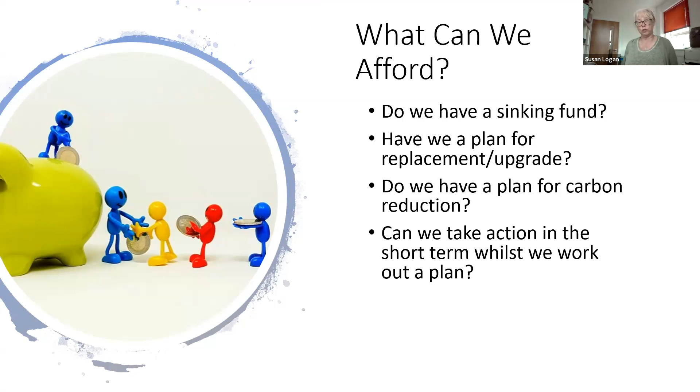Can we take action in the short term while we work out a plan? The sinking feeling that any heating advisor gets when you get the call - our boiler has failed, we need to put a new one in - has, I think, even increased since the new permissions, because we can't just say no, you can just put another gas boiler or an oil boiler in. You're going to have to think about it. If you've thought about it already, it makes it so much easier.

So don't leave it too late. Don't assume you'll get permission for like for like - with gas and oil boilers, you probably won't. You will have to think about what you've got to do. There are now quite a scattering of consistory court examples where churches have been challenged about trying to put like for like or carbon heavy systems in. If you've had advice from your heating advisor or from a professional, don't let it gather dust - make sure you act on it.

I have a number of examples of churches where I perhaps visited 10 years ago, and now they've got a crisis. Unfortunately, much as I would like to help, the DAC and chancellor's attitude is, well, you were told, and perhaps it's not as easy as you might think.

So get those reports out, get those quinquennials out and have a look at them. Have a plan for carbon reduction, which does not have to be a new system. People think that carbon reduction is a brand new, shiny, expensive system. It isn't necessarily. It can be using a smaller space, or putting a hybrid system in to allow you to use a more efficient system for some, if not all, of the year. So it doesn't have to be a new system. And I would say probably a lot of churches I go to, it's not a single answer.

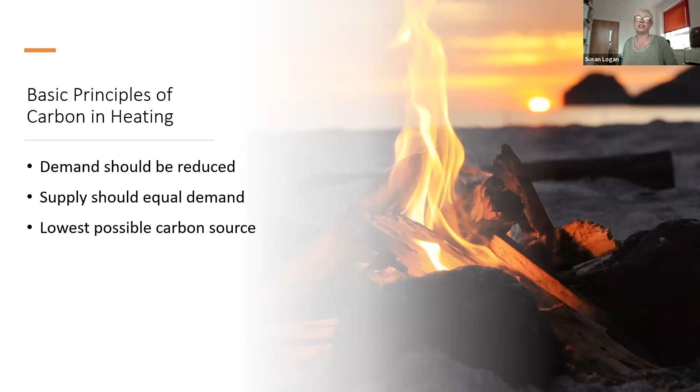Now, why is it in that order? And it is in that order. Low carbon heating systems are very expensive and cost quite a bit. Well, all heating costs a lot to run these days, doesn't it? So you must minimize the size and the demand of your system so that the capital cost is the lowest it can be and the running cost is the lowest it can be. It's not much point putting a massive, great electric heating system that you can't afford to run.

The Victorian churches were designed very often for a lot of people and a lot of fumes and odours, and therefore an awful lot of fresh air. We don't need that amount of fresh air. What we're doing actually is throwing heat out. So look at where the air's coming in and going out of the church.

Use space wisely. Don't heat any more than you need to. Seriously consider for small services of just a few people whether you could heat a smaller space. Deliver heat where it's needed to people - we'll talk a lot about people heating later on. And don't waste heat, putting heat where it's wasted, i.e. heating spaces that you're not currently using.

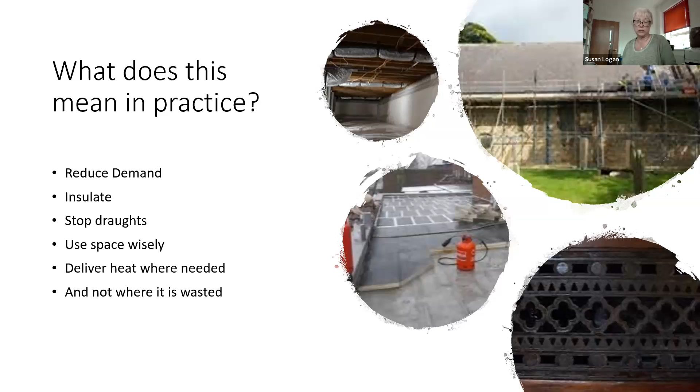So when we think about supply, we keep the size of system down if we can. We heat where we need it, again, we control and we zone it. There's a lot of debate about running continuously or not, and the answer is it depends. If you only use the church once a fortnight, then clearly running it continuously is not going to be a good idea. If, on the other hand, the church is used most days of the week, then controlling the heat between limits to let it cool off a little bit but not right down is probably going to be a better idea.

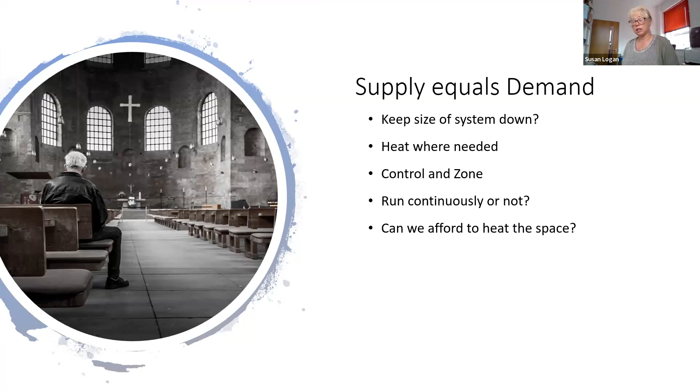Sometimes we will have to run our heating most of the time to preserve precious artifacts, but not often. Can we afford to heat the space? We've got to be realistic in this day and age with cost of living problems, with dwindling congregations in some places, with increasing fuel costs. We have got to be very, very realistic about whether we can frankly afford or wish to use the carbon to heat a very large space when we don't need it. And that's a hard fact, and it's a hard thing to come to terms with. I know that, but we do have to be practical and realistic on that topic.

Now, a little word about hours. People say to me, electricity is more expensive than gas or oil, isn't it? Well, yes, it is. It's about 3 times more expensive.

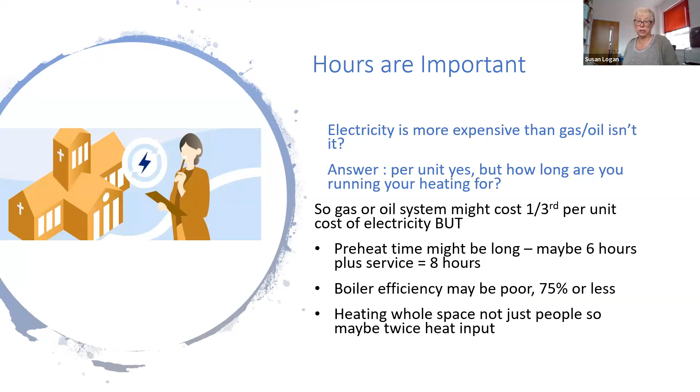But how long are you running your heating for? Your gas or oil system might cost a third of the pence per unit of electricity, but how often do we find churches where the heating runs all night just to get it warm enough for the service? The boiler efficiency may be poor, 75% or less, and we could be heating the whole space, not just people, so maybe twice the heat input. By the time you've looked at all of that, an efficient electric system is 100% efficient.

It might be on for 2 hours instead of 8, and it might have a lower capacity. Here's a little example: 150 kilowatts for 8 hours, delivering 130 kilowatts, 113 kilowatts, at 10 pence a unit. That 113 is after you've taken your boiler efficiency off. That might cost you £100 to £120 for a service. If you can deliver heat to where people are, for example under pews, with a much lower rated system in kilowatts, yes your unit cost might be 30 pence, but you're only putting it on for 2 hours, and basically it's a third of the cost. So even with an efficient boiler and 4 hours preheat, it could still be 70. You might not warm the whole space, but you may deliver comfort, and it doesn't have to cost more.

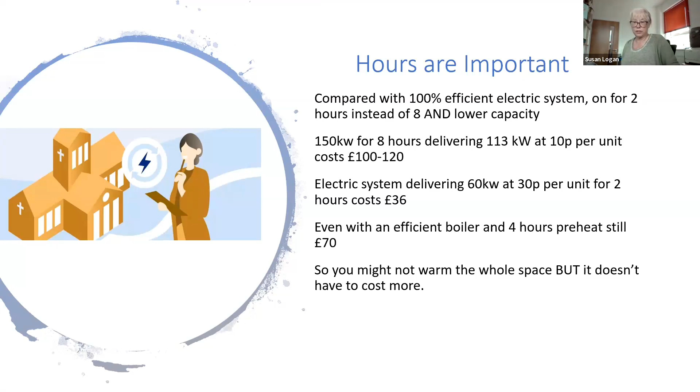The government puts out figures every year. These are average figures. The electricity figures fluctuate day by day, and you can look at any point and see a different carbon factor for electricity. However, these are averaged over last year. Electricity is still falling, and it's coming down. So how is that carbon generated?

It's at the power station. If a power station burns gas or whatever else, it emits carbon dioxide. Now, clearly renewables such as wind, solar and hydro emit an awful lot less, or nothing. Gas is fairly stable, though there's a possibility of greener gas or hydrogen in the future, or biogas from decomposition effectively blended into the mix. Hydrogen could be blended into the mix too, but not all hydrogen is green - it depends how it's made.

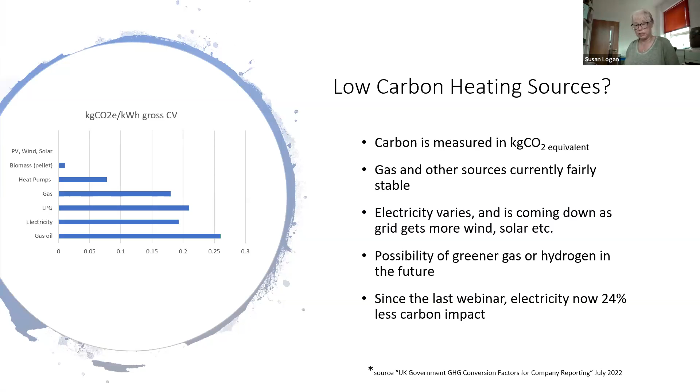Since I did the last webinar a couple of years ago, electricity is now 24% less carbon impact on average. So this is where our carbon comes from. Photovoltaics, wind and solar are zero in terms of their operational carbon, and biomass has a small impact. Generally it's a complicated equation with biomass, but there is a sequestration effect of CO2 in timber. But these are government figures.

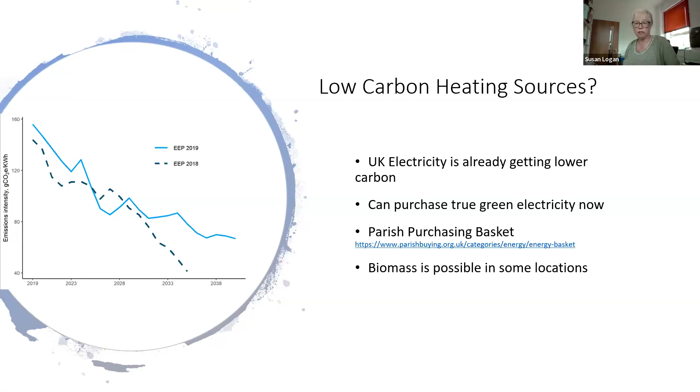You can debate them, but I use the DEFRA figures as an accepted industry average. So for our low carbon heating source, well, our UK electricity is already getting lower carbon. We can purchase true green electricity now via the parish purchasing basket, and biomass is possible in some locations. And we can of course put our own generation in terms of photovoltaic panels.

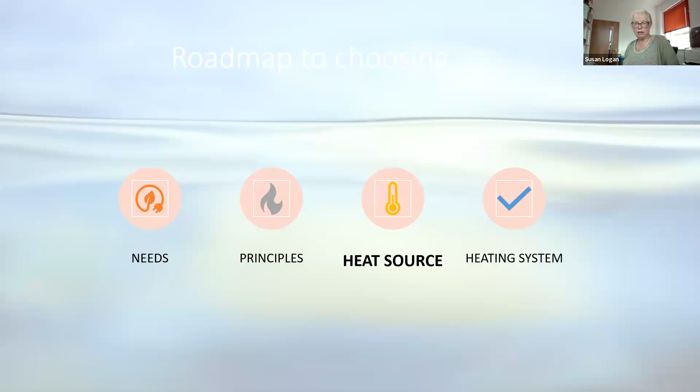So moving on then from principles, what does that mean in terms of available heat sources? What I'm going to do now is give a broad palette really of heat sources. So what to choose? As a principle, the lowest carbon source for the life of the system. Our church heating tends to live an awful lot longer than it does outside in the rest of the commercial world, partly because it's not used so often, partly because there isn't often the funding to replace it.

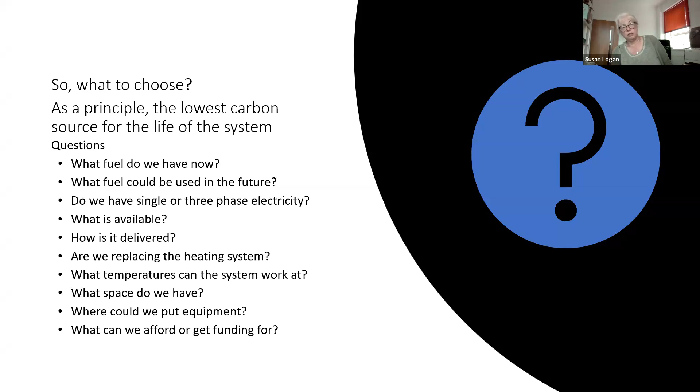So what do we have to ask ourselves? Some questions: what fuel do we have now, and what could we use in the future? One of the biggest questions is the third one: do we have single or three-phase electricity? And if we don't have three-phase electricity, could we get it? Why do we ask that?

Well, three-phase electricity gives you probably enough capacity to heat a medium to large church. Single-phase electricity, probably rated at 80 or 100 amps, would just about squeak through for a smaller church, but it won't really give you adequate capacity for a medium or large church. So that's why that's an important question. A lot of low carbon heating, such as heat pumps of any size, need three-phase electricity. So is it available?

In towns and larger conurbations, yes, three-phase electricity is probably available and affordable. In rural areas where there isn't the infrastructure currently, it could be unaffordable or just not even practically available. If you go out and walk in a rural area and see overhead lines with things that look like little radiators on poles, that's a little transformer, and that's a good indicator that the infrastructure probably isn't that good. It could be extremely expensive because if you apply for a three-phase supply, the local network operator may have to go a long way back to be able to supply it.

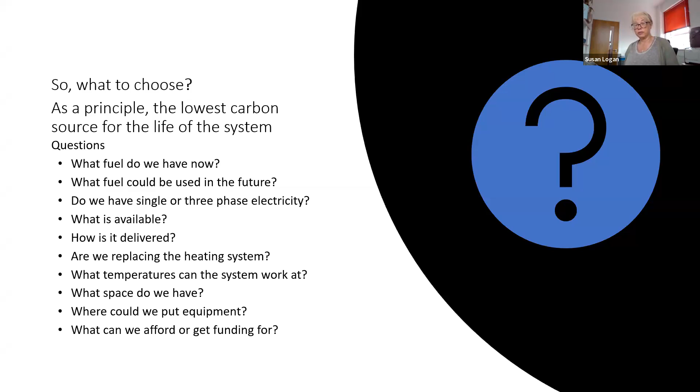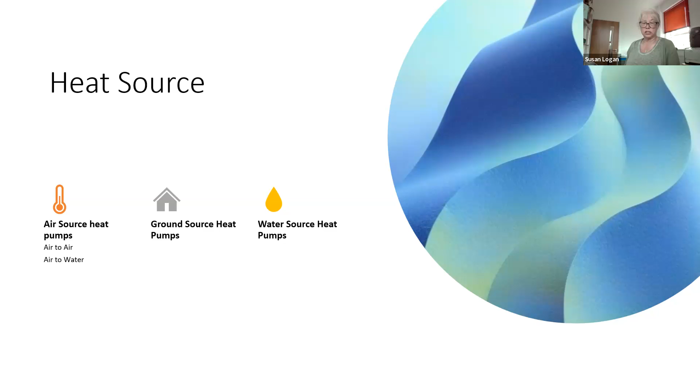So we come on to looking at heat sources, and the first grouping is heat pumps. I'm going to just have a look at the different types, because there's a few of them, and it's good to get that into our minds.

So the first type is a heat pump that goes to a wet system. What's a wet system? It uses hot water through radiators, fan convectors, underfloor heating, whatever. It heats water up. It works on electricity. As we've said, many churches will need a three-phase supply. You've got refrigerant gas in there, which is effectively the driving force. Very roughly, you get 2.5 to 4 times heat out for 1 kilowatt hour in. There are hybrid systems, or you can link boilers to them, where the size of heat pump would be too big, unaffordable, or not used at capacity for very much of the year.

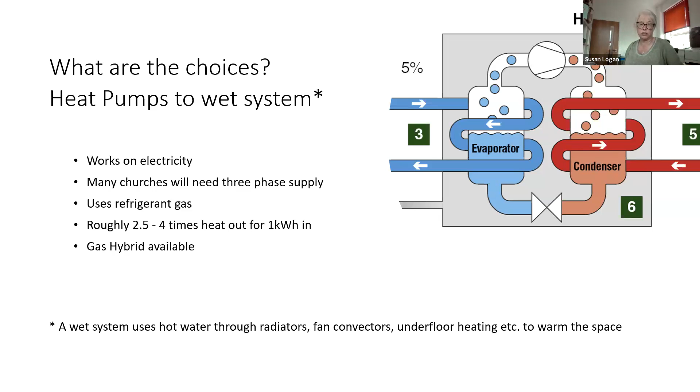Where does the heat come from for heat pumps to wet systems? Well, it can come from the air. Somewhat miraculously, it's just a reverse fridge, really. It's less efficient than ground or water. The big issue that catches people out is that the efficiency varies an awful lot by season. When the weather's mild outside, you might get 6 times heat out for one unit of electricity in. But when it's really, really cold, you might get 1 to 1.5. So the bills can be lumpy.

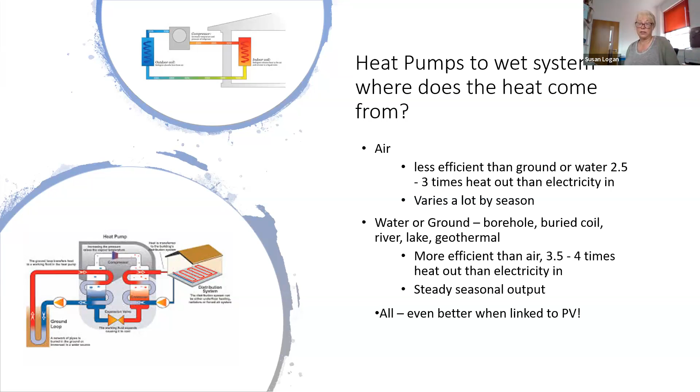Just be warned on that one - it will even out over the year, but it can be a bit of a shock in cold weather. The heat can come from water or ground, from boreholes, from buried coils, from rivers, lakes, geothermal sources. These are slightly less common, of course. They're much more efficient, or substantially more efficient, than air. Steady seasonal output, but the capital cost is higher and there's more engineering and investigation needed. All of them are better linked to PV, because then you're getting free electrical input to them, not necessarily to offset all of it, but some of it.

But there's another type that I'm increasingly finding useful, particularly in smaller churches, and these are air-to-air heat pumps. They're not the prettiest things in the world, although you can put them in casing. They're quite efficient, and some of them can run on single phase, and you can install them in phases - so if you can only afford 3 to begin with, you can put 3 in, then add more when you get more funding. You don't necessarily have to commit to a huge amount of funding. You can also put them on top of an existing heating system, running the air-to-air heat pumps when they provide enough heat, and topping up with your older fossil fuel system, eventually phasing it out. So it gives you a softer introduction to low carbon heating.

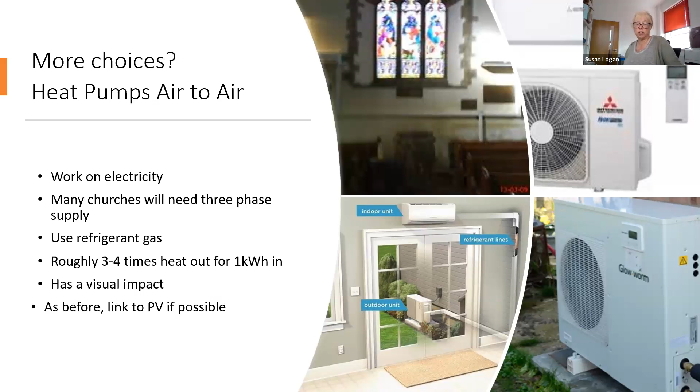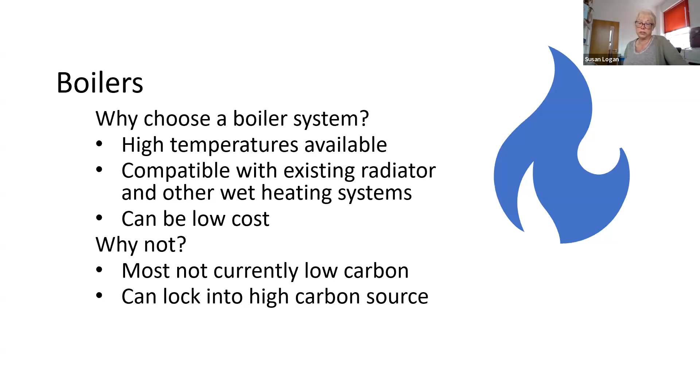But we can't disregard boilers, can we? They are the mainstay of our heating. Why choose a boiler system? Well, it gives you higher temperatures, it's compatible with existing radiators, and it can be low cost - but it can lock you into a high carbon source. Therefore, as a standalone solution, it's unlikely to be accepted in this day and age if there is a viable alternative, and more often than not there is at least a partial viable alternative, if not a 100% solution.

So a quick summary of our boilers. We've got gas - we all know what a gas boiler is, so I'm not going to go through this word for word. The future is uncertain. Obviously you will know that gas boilers are being phased out of new housing by 2025. Obviously we will continue to be able to purchase gas boilers for a long time, but they're not a green solution at the moment.

Biogas has poor availability. It may get better - there may be local availability unusually, but in certain areas, particularly where there's farming and anaerobic digesters, you could have a local source of biogas, and that of course would be a green solution if you could find it. So at the moment biogas is a minority, but it is feeding already into the main grid.

Hydrogen - lots of debate about hydrogen, uncertain, we don't know. There's likely to be hydrogen hubs in very high usage areas, and hydrogen is probably going to feed into the grid. Some boilers are suitable for conversion. So at the moment we don't know, but I don't think you can rely on it as a low carbon solution to say, well, I'll put a boiler in that's going to be converted to hydrogen. That really won't wash, particularly if you're in a rural area, because the chances of getting hydrogen are really quite low at the moment.

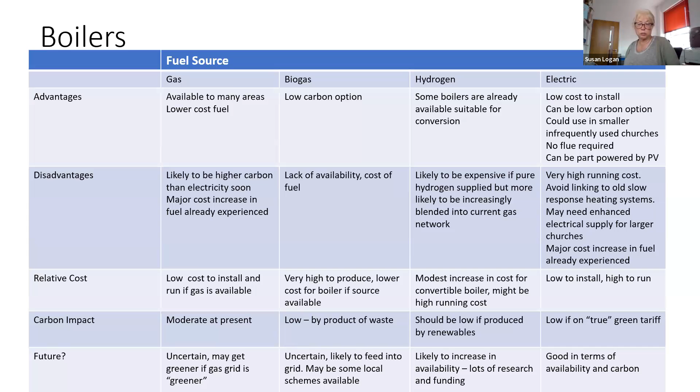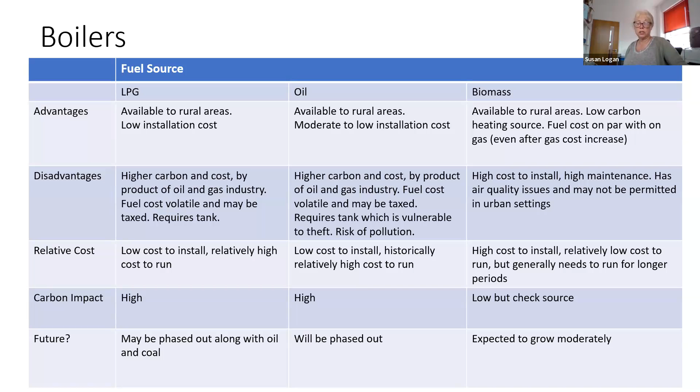Liquid petroleum gas, or Calor gas, is available in rural areas, but it's not a green solution, possibly going to be phased out, and is always going to be linked to the oil and gas industry - so generally not recommended. Oil we've already discussed, and biomass - which is a boiler that runs on wood pellets. We could also include log burners in that, but that's all biomass. The problem with biomass in inner city areas is air quality, because they do emit particulates, and there's quite a lot of restrictions on them. Having said that, if you've got a rural area with good availability of local biomass, then it's certainly a low carbon possibility, if you have an enthusiastic congregation that will manage the source. So I would always encourage people to be open-minded on biomass.

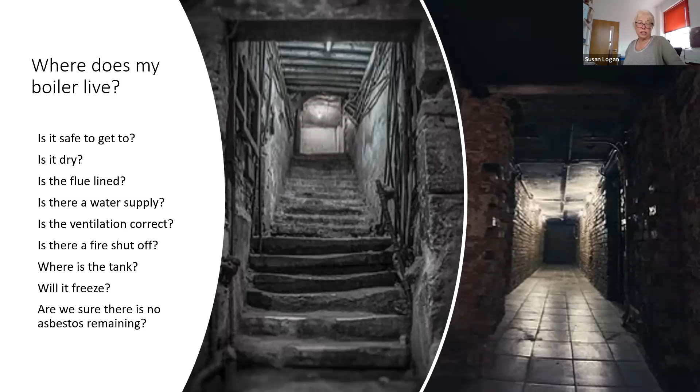And we need to look at where our boiler lives if we've got it, because unfortunately boilers live in some fairly damp, dark locations. The one thing I would say is that a lot of modern electronics will not take kindly to the damp undercroft. There's a few questions there about where we should put things, because I do come across a lot of unsafe and unwise locations for our plant - not just boilers, but anything really. We need to often think about a new location.

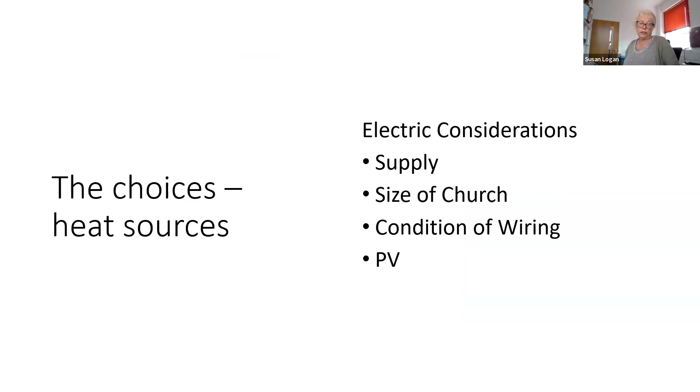Obviously, electricity is a heat source, but I'm going to come on to that when we look at the actual emitters a little bit further in this presentation. A few considerations that we've already talked about. Have we got anything else? Well, there are some other sources.

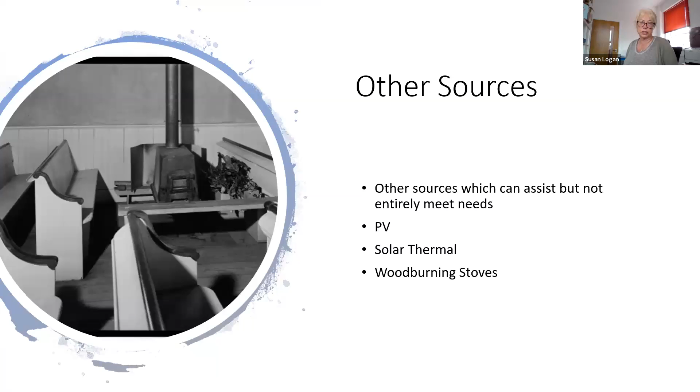Churches used to have, quite often, very small churches had a wood burning stove, and a modern wood burning stove in a small church should be in our palette of possibilities. We obviously have to make sure that it's safe and that nobody gets burnt on them, but nonetheless, they are a nice, warm and traditional heat source. We have our photovoltaic panels, we have solar thermal that can, in some instances, heat our domestic hot water that comes out the taps, and our wood burning stoves.

So now we come on to thinking about the system itself. This is the bit that delivers the heat to where you are. This is the bit that makes you comfortable. And of course, is probably the most important thing at the end of the day. It's what we see, it's what we feel, it's what we experience in our churches.

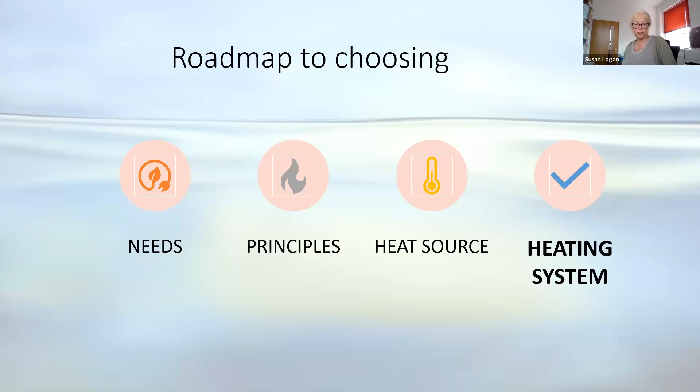First of all, we need to think about safety. A risk assessment, no matter how simple, we need to think about our users. Have they got vulnerable adults, young children? Is our system safe for touch? If it is, then obviously we need to think about emitters that are either protected or are intrinsically low surface temperature.

If we've got spaces where there's a lot of sport or activity, equipment is likely to be damaged. A good example is copper pipe, which is not what it used to be. It's quite thin and was regularly run into with vacuum cleaners until it was actually useless. So we have to think about what damage can occur. And can we keep people away from equipment? Clearly we don't want anybody to be able to access boilers and controls.

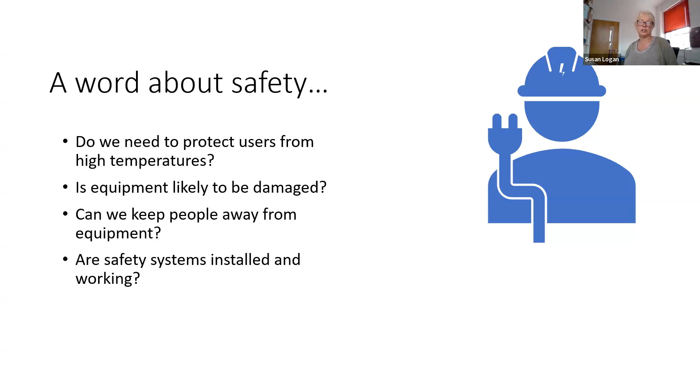And have we got safety systems installed and working? By that I mean, what happens if there's a fire? What happens if there's an emergency? What happens if the boiler or the heat source goes wrong? Have we got safety systems, and are they installed, working and checked? So things that might, for example, isolate our gas or oil.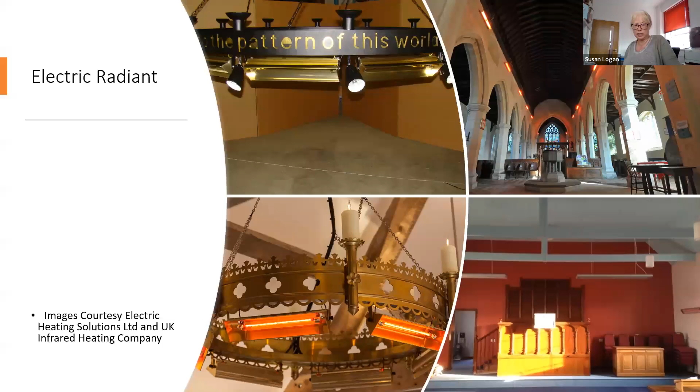The bottom right-hand picture, you can just see some white panels suspended, and they're called far heaters. They don't glow. They're not particularly hot, and they're very useful in certain instances. But you'll see there that they're mounted quite low, and they have to be, because if they're mounted too high, they really don't work. But where you can mount them quite low and near people, they're another useful form of radiant heating. So summing up on that one, we've got electric heating, radiant and far.

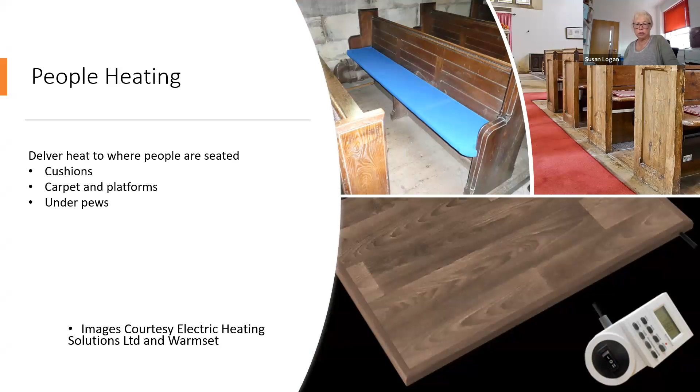People heating, delivering heat where people are seated. So we've got cushions, carpets, platforms, under pew heating. You'll probably be familiar with that, so I'm not going to spend too long on it because I haven't got that much time. So we've got our cushions, and all of these, of course, are low carbon sources.

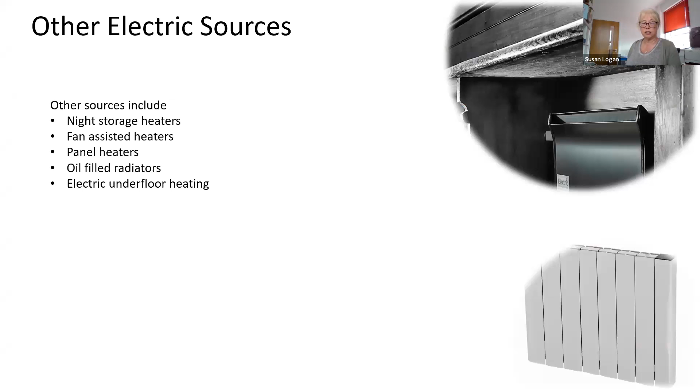Other electric sources, we've got night storage heaters, fan assisted, oil-filled radiators, and electric underfloor heating. All have got their uses. The only thing I'd say about electric underfloor is it can be very expensive to run, but it can have its uses for small, hard-to-treat areas. I've seen it used in a pilgrim sleeping space, which was only a few meters squared, and it was quite a good solution.

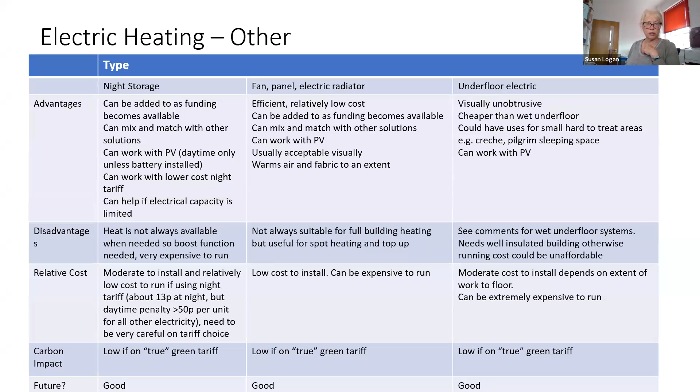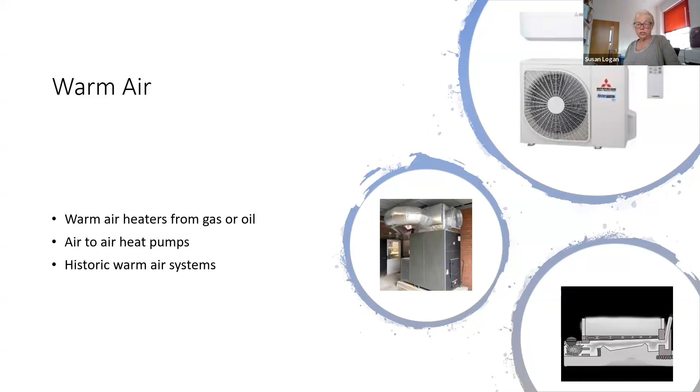We've got our air-to-air heat pumps, which we've already talked about in the heat pump section. So here they are again as a warm air heater, because that's what they do, they warm the air. And then we have sometimes encountered some historic warm air systems where a boiler did actually directly heat air in ducts. What's of use to us now? Probably only the air-to-air heat pumps, I guess. The direct or indirect gas or oil air handling systems, if you've got one, you probably need to think about replacing it.

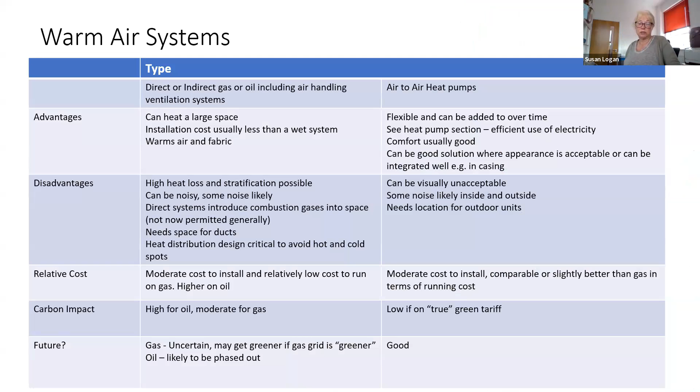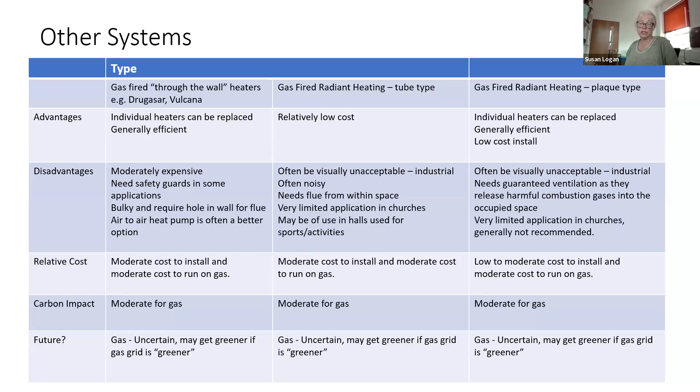Gas-fired radiant heating, very industrial. I've never seen it in a church. It is possible, and I have been asked questions about it. They're quite noisy, but again, as a gas, they may have their uses in sports halls, but not really in our churches in general. And then you sometimes come across old plaque gas-fired radiant heating. So it looks like a radiant heater. It's got a gas supply to it. Unsafe generally, and if you've got that, you need to be looking to replace it. It does put out quite unpleasant fumes into the space.

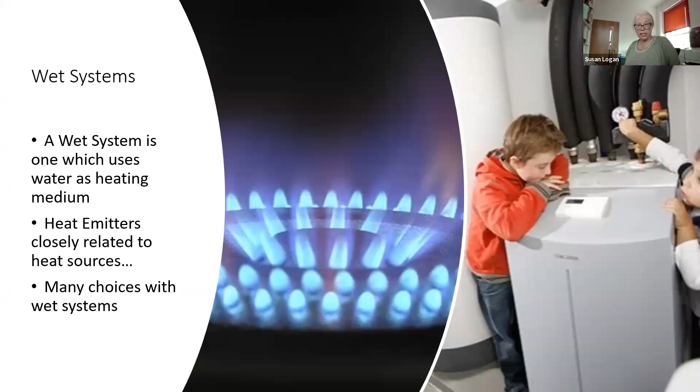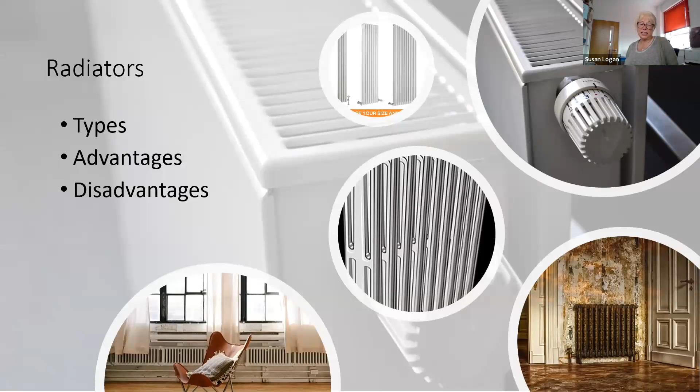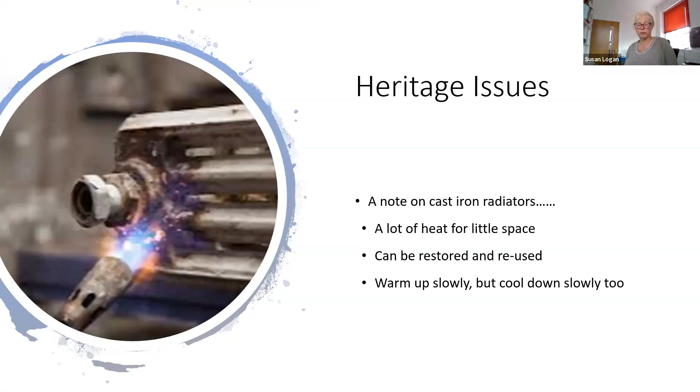And then lastly on our systems really is wet systems. This is the thing we are all familiar with. This is water as a heating medium. So we are with our radiators of one sort or another. Radiators are great. They're comfortable. They provide warmth, a perception of warmth, particularly when they are close to where people are. They can take up quite a lot of wall space, but there are types that don't. If you've got cast iron radiators, don't dismiss them. They can produce a lot of heat for little space. They can be used on low temperatures as well, although they'll need to have additional capacity if you're putting a lower temperature to them.

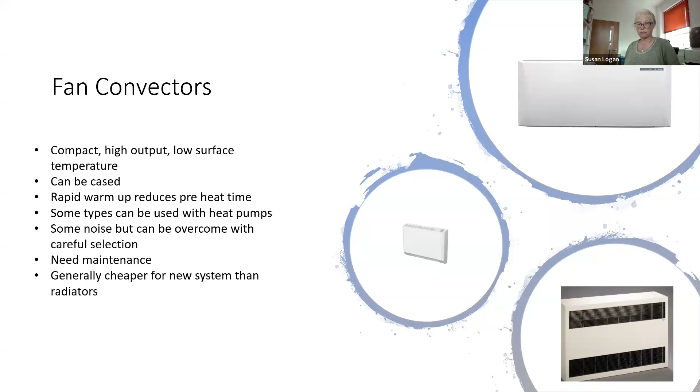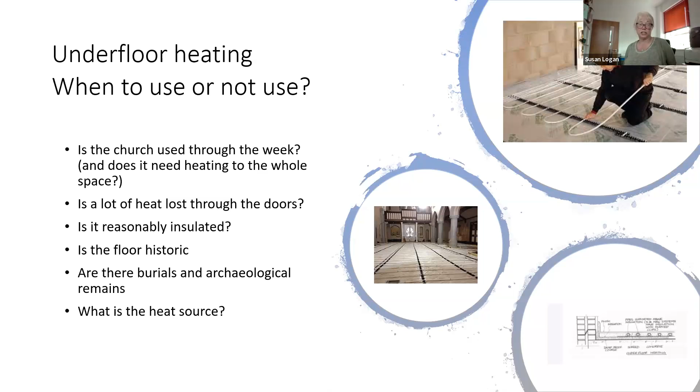And there's a lot of debate about destruction of historic floors, destruction of burials, archaeological remains. Changes in level is another big issue because you've got to insulate underneath and it causes changes in levels. And have we got a suitable heat source? But if you've got a well-insulated space and a heat pump, underfloor heating should definitely be considered for spaces that are used for a lot of the time.

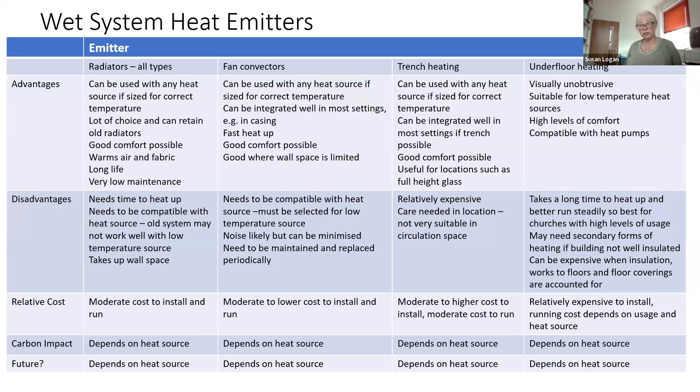I'm running out of time a little bit, so I'm not going to go over the summary of this because we've still got a few slides to go, but you will get the slides later.

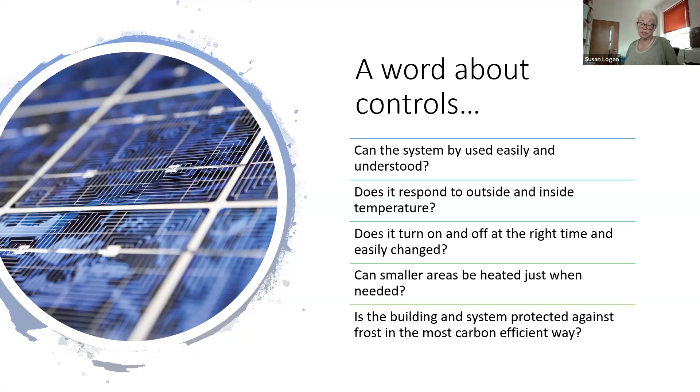Water doesn't freeze above zero. It doesn't need to be protected that much. And generally, buildings don't need to be protected against frost unless you've got something very precious in there.

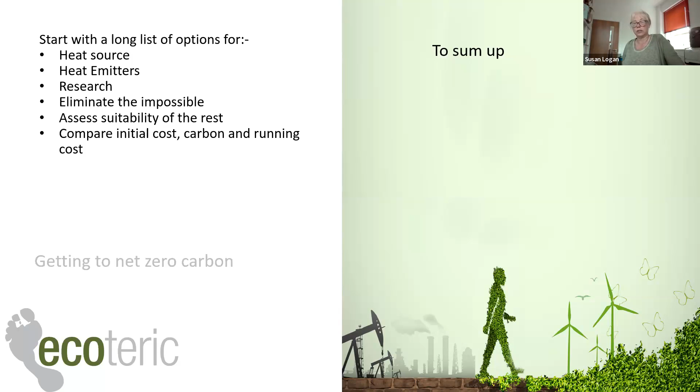So to sum up, what do you do? Start with a long list of options. What could you do? Research, eliminate the impossible. Assess the suitability of the rest. What fits, what's right? And then look at not just the first cost, but the carbon and the running cost as well. Get yourself down to a short list, get some budget costs, seek advice, develop proposals, and of course, seek funding.

Look at the whole life cost. What do I mean by whole life cost? What I mean is the capital cost plus the fuel and carbon, the fuel cost used over the life of the equipment, running cost now and in the future. Where's cost going to go? Well, we can't possibly know, but then we couldn't predict what was going to happen to energy cost before. What we do know is it'll probably go up. It's not beyond the bounds of possibility that we'll get carbon taxation in the future. What's the life of the equipment and what grants and subsidies can we get?

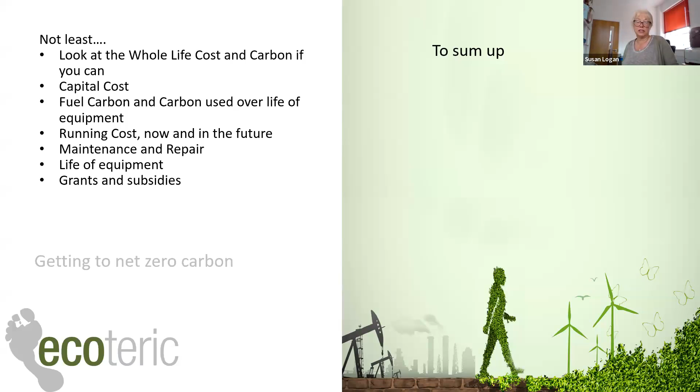Got more questions than answers? Well, get good impartial advice. Record what you have, what you need, set a budget for now, and remember one size does not fit all.

Catherine, do you want to go straight on to questions, or should I just do the couple of case studies? Slightly running out of time here. I think let's cover the case studies because people will find them very useful, I'm sure. Okay, that's fine. A couple of minutes then.

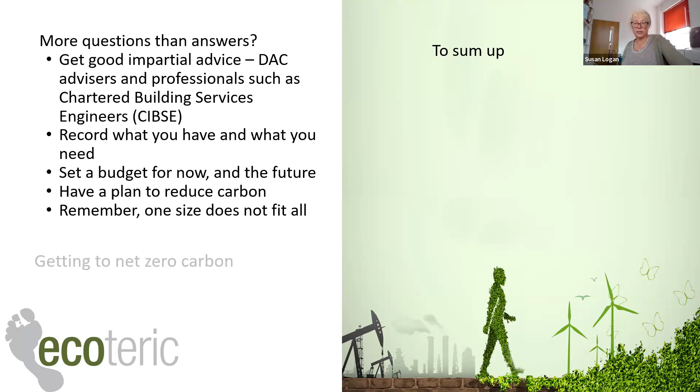We've done some case studies in the St Albans Diocese, very carefully chosen churches to represent a very typical cross-section of the type of church that is encountered in most dioceses. We did four, I did two on the other presentation. Here we have the very common large Victorian church that would, at one point in its history, probably have seated 800 to 1,000 people, but a congregation now of probably 40 or 50. It's got a gas boiler, it's not warm enough, and it's not fulfilling the mission and vision of the church.

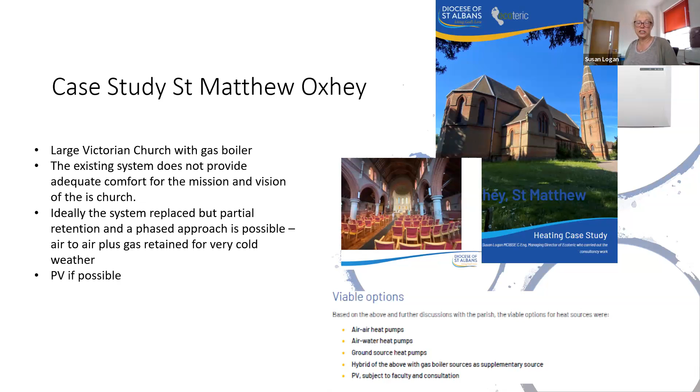Obviously, funding is limited. So when we did the long option appraisal on that one, ideally the system would be replaced. But given the church's circumstances, a partial retention and phased approach is possible. Put some air-to-air heat pumps in for the time being, plus the gas retained for very cold weather. And if possible, put some PV on there. So this was a very classic hybrid, phased, manage things in chunks solution.

And then this one was our very typical small to probably medium-sized rural church, important architecturally, as is common in rural situations. It doesn't have gas.

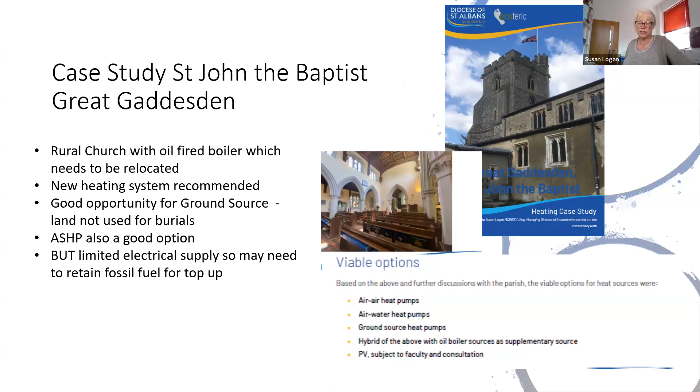So sometimes if you can't do everything, you can at least do something. And I take that last comment, hopefully, to take away: do something, not nothing.